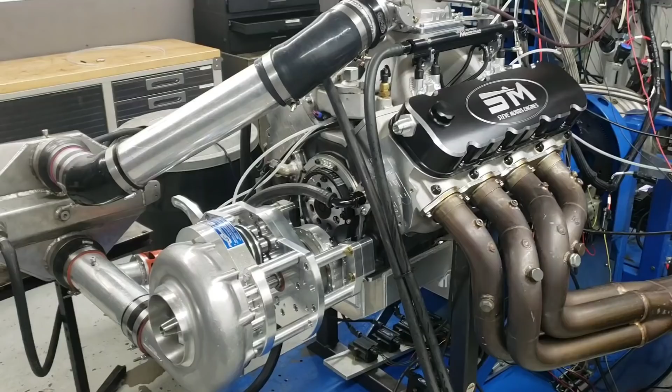This is one of our typical 540 cubic inch engines, fast bracket, top sportsman, any type of race or street car, any kind of racing you want to do. This is also on gasoline, hence you see the IC4000 intercooler.

Now, this one happens to be on Holley EFI, and on gasoline. The other different combination we're using here is a set of AFR Magnum 18-degree heads and matching intake manifold. So we do the intake conversion on it. We don't have a billet intake manifold for this cylinder head setup, so we do a conversion on a single 4-barrel style intake manifold.

Now, Kevin didn't originally want the horsepower that this thing will generate, so he was looking at something smaller, but then he changed classes of what he wanted to do, so he wanted to go up into the 2500 horsepower and below area. So we're going to do 3 tunes on this engine, and I'll show you the horsepower tunes and what it makes on each tune with a gear change set.

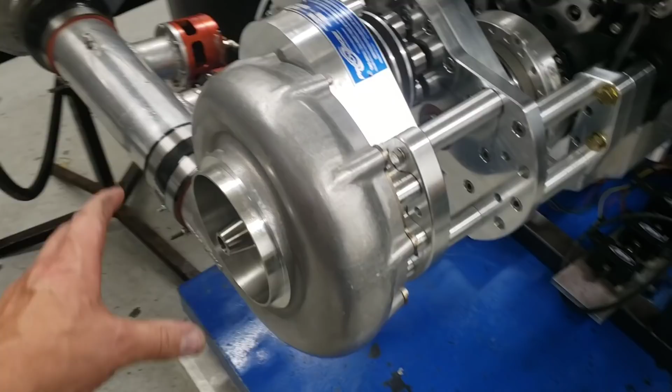Now, obviously, we're not trying to make max horsepower, so I don't have one of our ProVolute bells on the 136. This is a ProCharger 136 with a supercharger store gear drive, and our normal componentry, everything you can find on our website for this style and size engine.

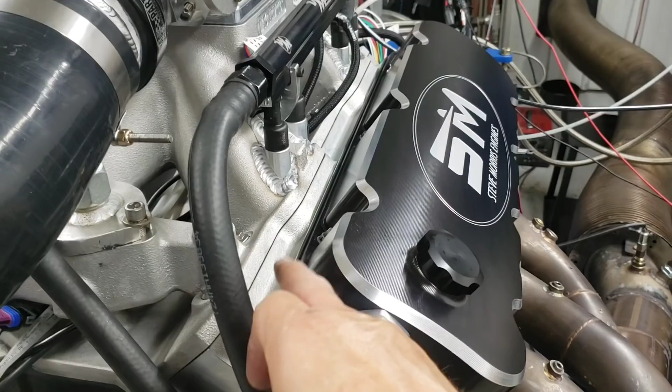And like I said, what we've done here is we've done this one with these AFR heads. We wanted to try these AFRs, see what they are. Looks real good, happy with those. So everything—they have an interesting intake flange, so they don't take a common intake manifold, that's about the only problem I have with them. They don't use the intake manifolds that I have for stuff, but look to be a good quality, solid cylinder head, and AFR typically does real good stuff.

So like I said, 540 cubic inch, this has our piston and rod package. Now this would be a steel rod, because the gasoline stuff we do in steel, but we don't do steel rods in methanol motors—we would use aluminum rods in only those. So anyways, real good solid piece here, and what we're going to do is go out, make a pull, and then I'll show you all the previous pulls on top of that.

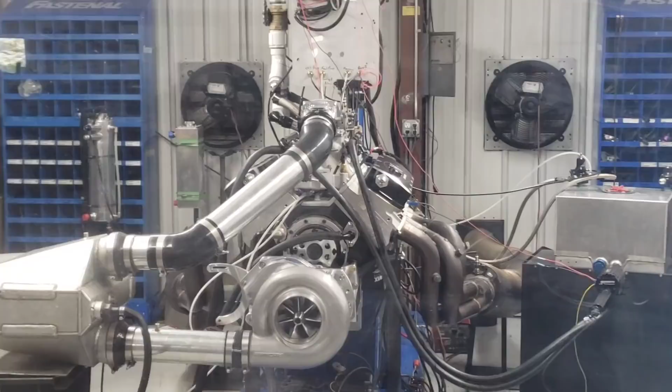Alright, now let's take a look at the numbers. This is right on the pull that we just did, and I'll show you the lower boost with no timing in it, so the really super starter tune, and then the next one, which would be the lower boost gear set with a good tune in it, and you'll see a difference. And then this is a different gear set with a good tune in it, so this would be like just a nice solid good all-around tune.

And as you can see here, 2508 at 7600, just starts to roll up here. I mean, it might make 2510 or whatever if I rev it up higher, but it's nice, it's good all the way up through there. 1765 in torque at 7200. You can see it keeps on climbing up through here, which is real common.

And then in the theoretical world, boost would keep on increasing if the blower never got less efficient, and if the motor never got less efficient. It would just keep on climbing, and peak torque would be all the way out here. But we always run into lower efficiency of the motor, and the combination of those two. So that always makes that difference. Anyways, real good piece here.

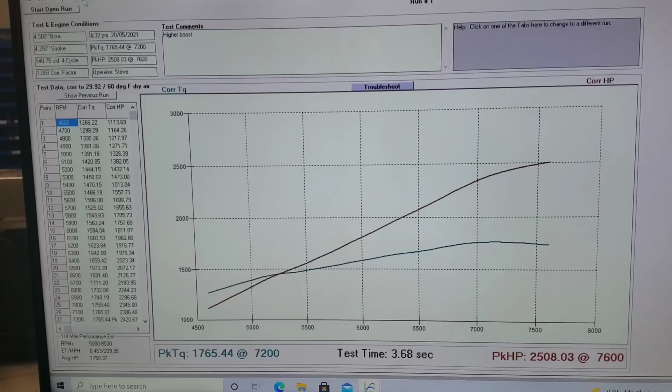Let's go over and look at our boost. Now this boost gauge, someday I just need to rescale it because it makes about 1 pound different than what it actually makes in the map sensor. I believe the map sensor versus the gauge on the dyno. But 31 pounds of boost at 7,600, and then the map sensor only says it makes 30 right there at 7,500.

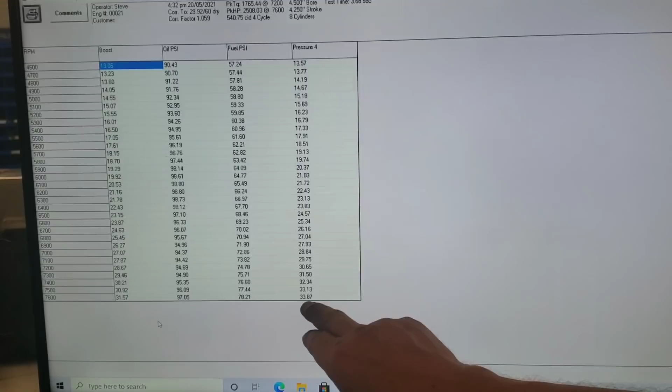And this was actually me doing a pressure differential. This pressure right here, I was curious, and I haven't done it for quite a while—done a pressure differential on the inlet of the intercooler. So this would be inlet intercooler, this would be intake manifold, so you can see there's a 2 pound differential there. So 2 pounds boost pressure differential in an intercooler—that's pretty good. But that's the big intercooler from Chiseled, the big 4000 intercooler. Anyways, real good solid piece.

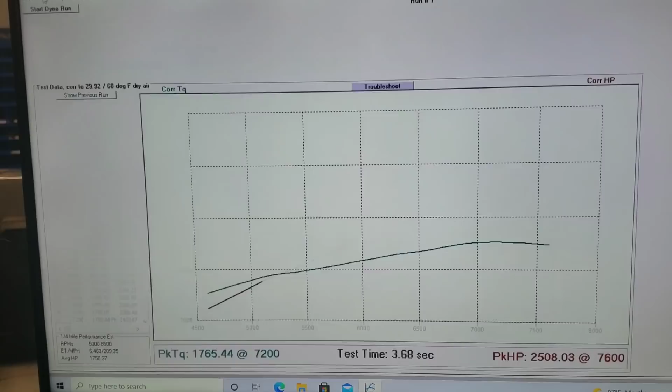Oh, I'm sorry, I was going to show you the lower stuff, so let me bring those up. Okay, here you can see—now this tune right here is the starter tune, easy squeezy, a little bit lower boost. This makes 25 pounds of boost with this gear set that was in it here, and that was at 2,038 horsepower at peak. It might go up just a little bit more, but it's going to be rolling over right in that area.

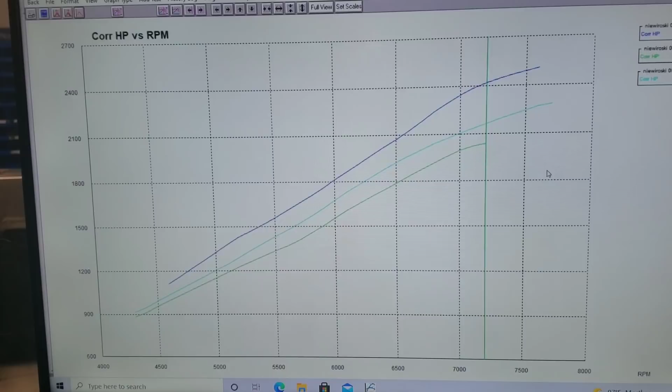Now this is the same gear set right here, that light blue line, and because I have more timing in it, it's not laying over even more—it carries out farther, and you can see right out here. Let me turn the camera just a little bit. You can see in this upper corner that it made 2285.

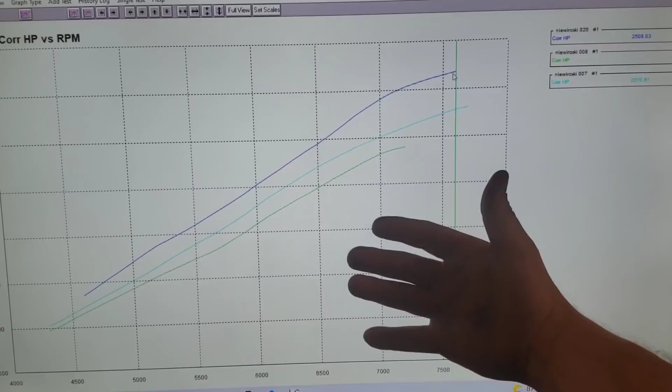And then this is with the gear change and with the good tune-up, and this thing makes 2508. So real good, nice 3 tunes for Derek, and any of these applications that we can do this kind of intercooled gasoline combination—this thing works in anything from donk racing to fastest street car to bracket, it'd be fast bracket obviously, top sportsman type stuff.

So anyways, real nice, good solid piece for Derek, and all based off of one of our—this one's a modified version because of the AFR heads, like I talked about earlier. But real nice, good solid piece, good dependable 2,500 horsepower all the way down to 2,000 horsepower, just with a simple gear change and tunes.